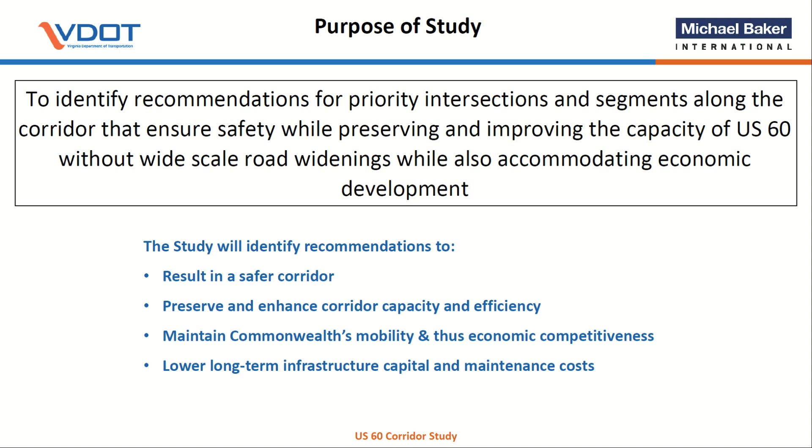The purpose of the study is to identify recommendations for priority intersections and segments along the corridor that ensure safety while preserving and improving the capacity of US 60 without wide-scale road widenings, while also accommodating economic development. The study will identify recommendations to improve safety, preserve the capacity and efficiency, maintain the Commonwealth's mobility and thus economic competitiveness, and lower long-term infrastructure capital and maintenance costs.

The scope of work for this study was to analyze intersections and 14 miles of segments along the corridor for development of detailed recommendations. These locations were determined by historic traffic volumes, potential for safety improvement as defined by VDOT, the crash history, and stakeholder input. The study assumed a 2040 horizon year. This horizon year represents the last year of projection period for need determinations.

We reviewed the future conditions to include additional traffic from other areas, for example, the proposed landfill and anticipated residential growth in Powhatan and expected growth as projected by the state and other planning bodies. We also reviewed if the current roadway and the future roadway with proposed improvements would be able to support this demand. Arterial preservation techniques were applied as feasible with VDOT's Arterial Preservation Program.

The study will identify opportunities to improve roadway geometrics and access management. It will also determine the existing and future capacity of US 60. And then finally, in response to citizen feedback, VDOT requested the completion of a roadway safety audit for the two-lane segment of US 60 between US 522 and State Route 601. This included site visits, a review of volumes, crash history, operations, road conditions, and geometric features.

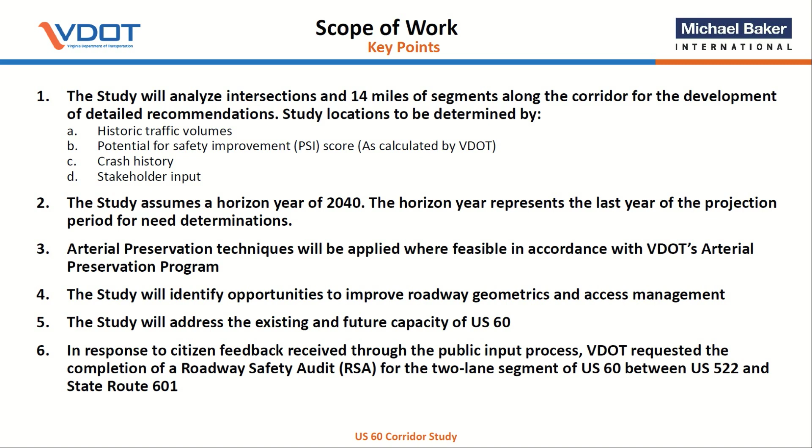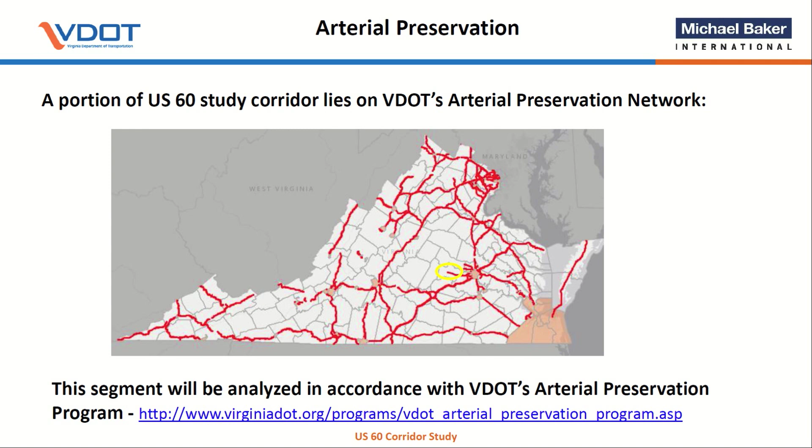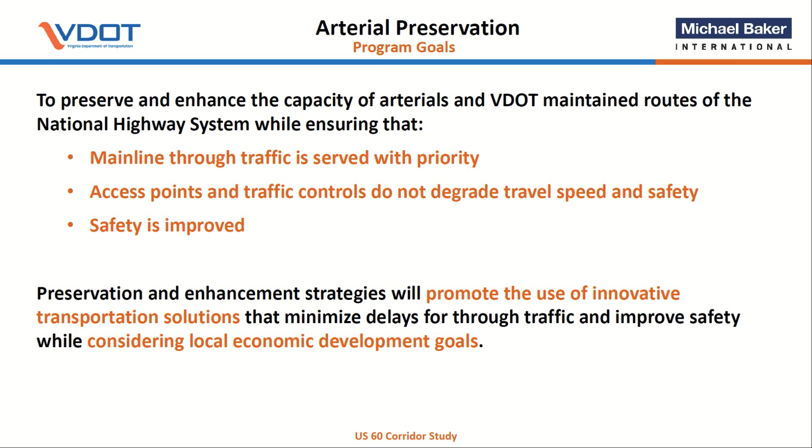The goal of the Arterial Preservation Program is to preserve and enhance the capacity of arterials and VDOT maintained routes of the national highway system while ensuring that the mainline through traffic is served with priority, access points and traffic controls do not degrade travel speed and safety, and that safety is improved. Preservation and enhancement strategies along the Arterial Preservation Network will promote the use of innovative transportation solutions that minimize delays for through traffic and improve safety while considering local economic development goals.

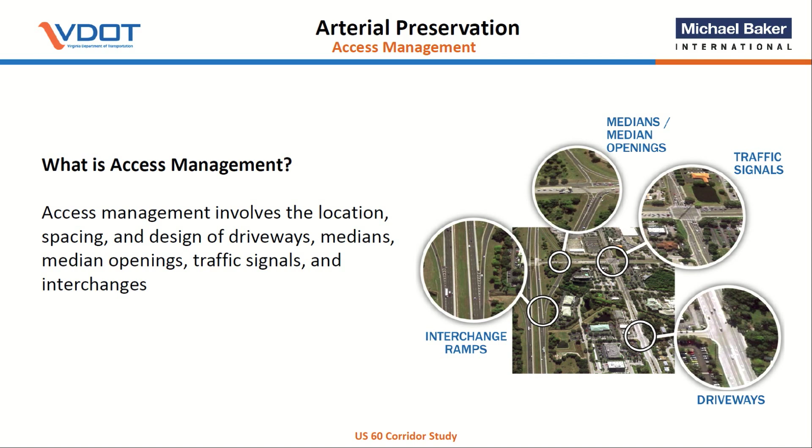One of the main tools of arterial preservation is access management. Access management involves location spacing of intersections, design of driveways, median openings, location of traffic signals, and location of interchanges. The guiding principles of access management include limiting the number of conflict points, separating the conflict points, and looking at conflict points from a network perspective.

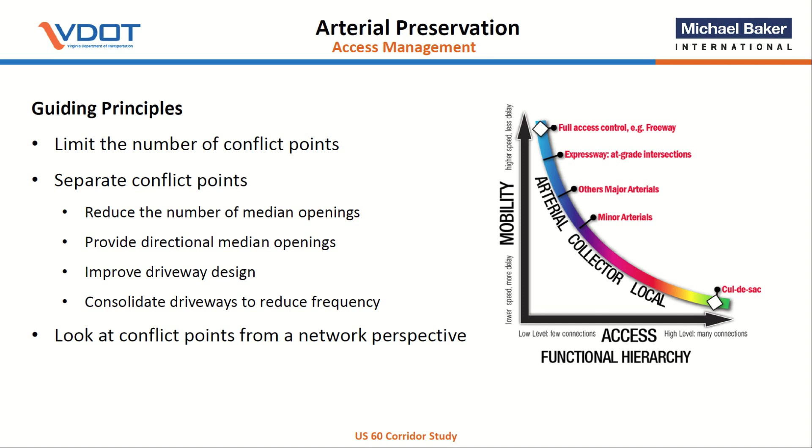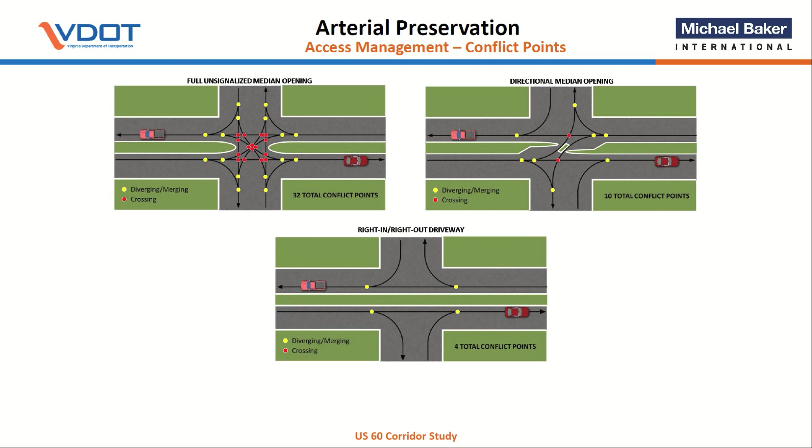In an ideal scenario, our arterial highways will provide a high level of mobility while our local roads provide a high level of access. In this example, we can see how simple access management techniques are effective in reducing conflict points. Conflict points are places where the likelihood of a crash occurring is greater. A full movement intersection contains 32 conflict points. That's in the top left box. By adding a directional median, that number can be reduced to 10 conflict points. That is in the top right box. If the median is closed, the conflict points are further reduced to 4. That is in the bottom box.

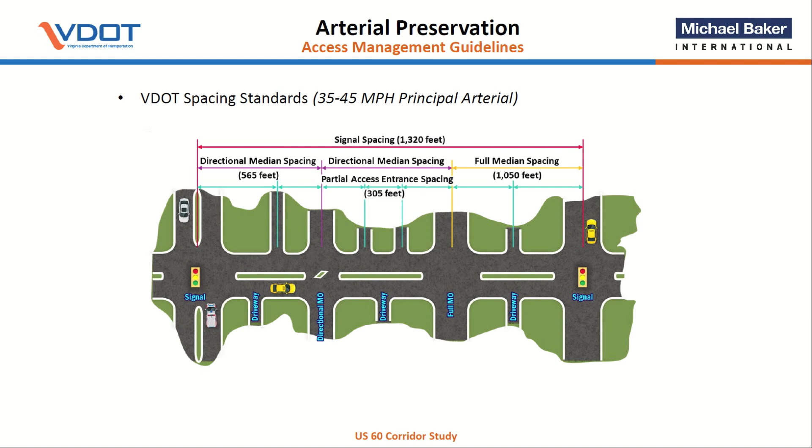VDOT maintains access spacing standards that take into account speed limit, functional classification of the roadway, and the number of conflict points at the intersection. Recommendations in the US 60 corridor study comply with these standards. It should also be noted that Powhatan County also has their own access management guidelines that were also applied for this study.

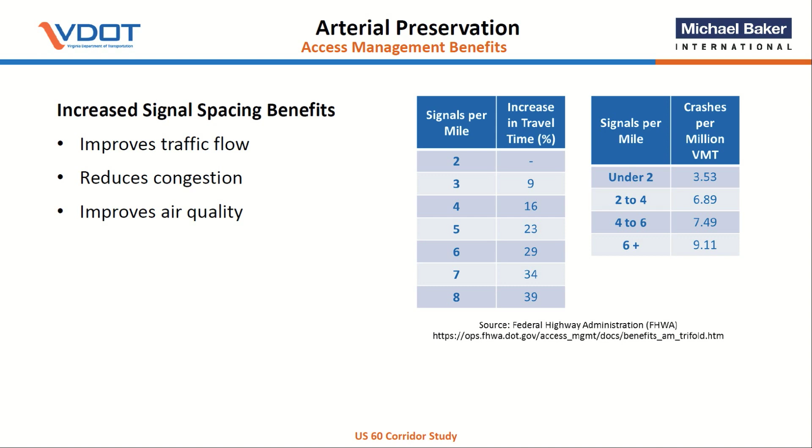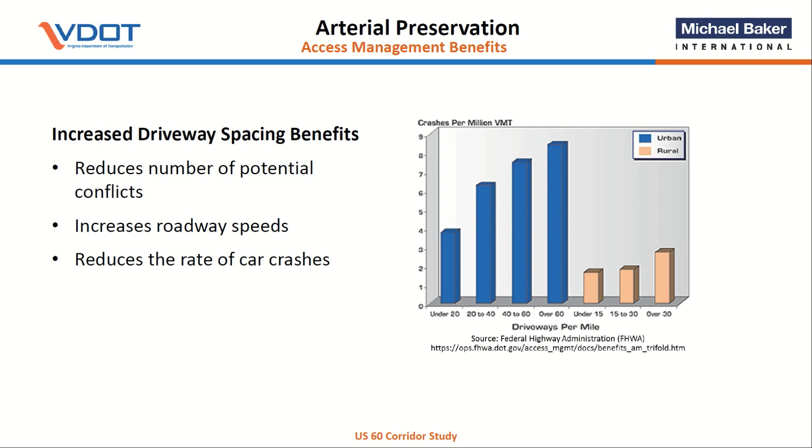As an access management strategy, increased signal spacing benefits include improved traffic flow, reduced congestion, and improved air quality. Another effective access management strategy is increasing driveway spacing. That reduces the number of potential conflict points, it maintains the speed of the roadway, and it reduces the rate of car crashes.

The other major tool for arterial preservation is the use of innovative intersections. These are designs where traffic movements are modified to improve safety, reduce delay, and increase efficiency. They have been proven to reduce delays and crashes by as much as 50%.

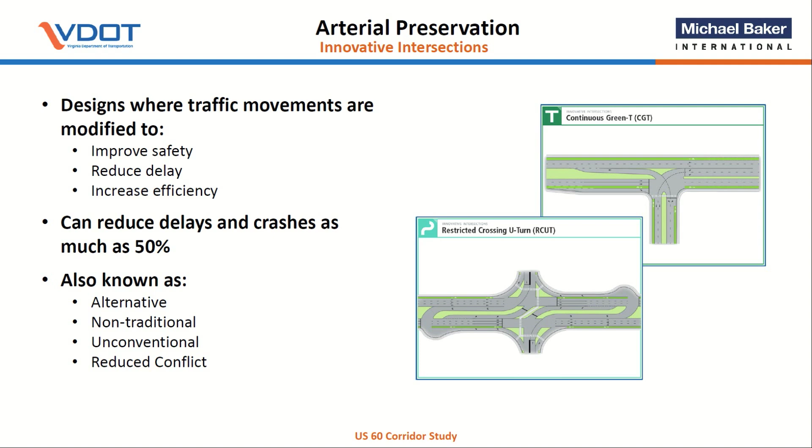Innovative intersections seek to reroute left turn movements. Since all traffic has to stop to permit a left turn, this helps to more efficiently serve the through traffic. They seek to reduce signal phases and reduce delay by allowing for longer green time on the through movement. They also improve safety by removing and separating conflicts.

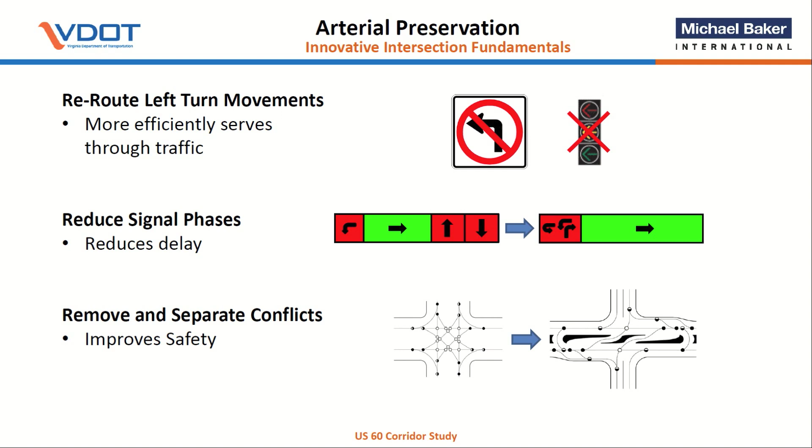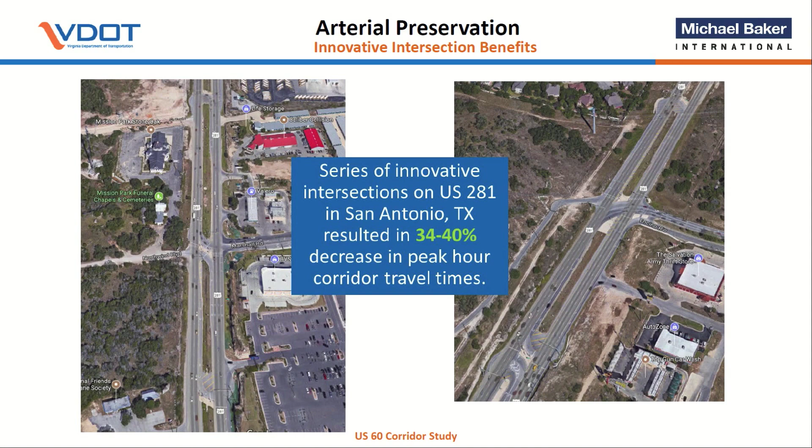The following two slides show examples of innovative intersections within the United States and their benefits. A series of innovative intersections on US 281 in San Antonio, Texas resulted in a 34 to 40% decrease in peak hour corridor travel times. A safety analysis of restricted crossing U-turns, or RCUT, intersections in North Carolina found that fatal and injury, angle, and left turn crashes decreased by more than half following the RCUT installation.

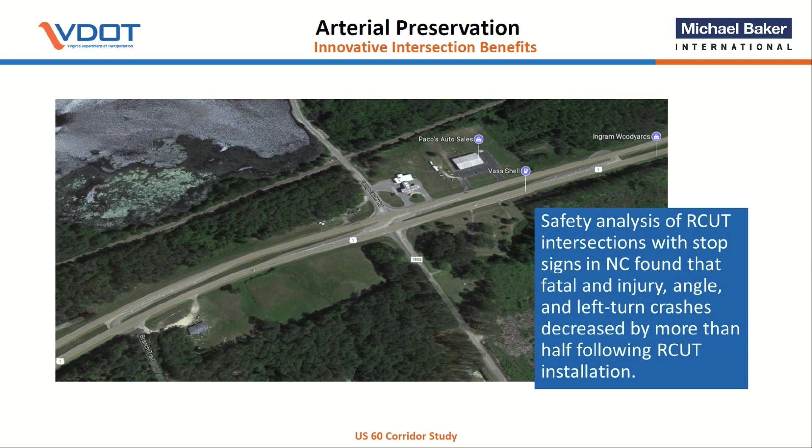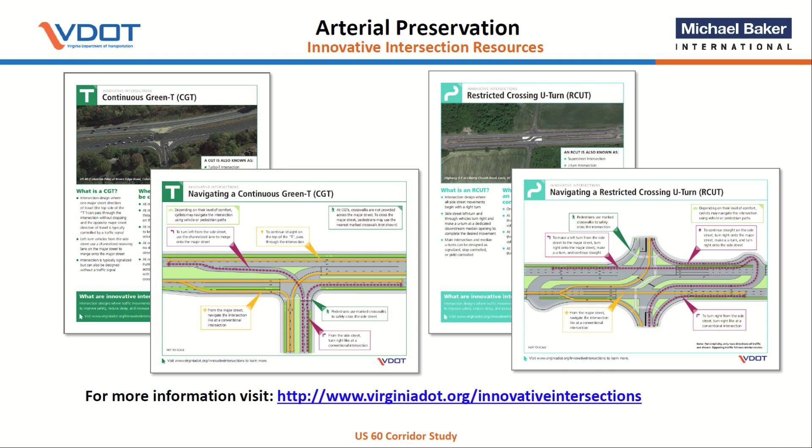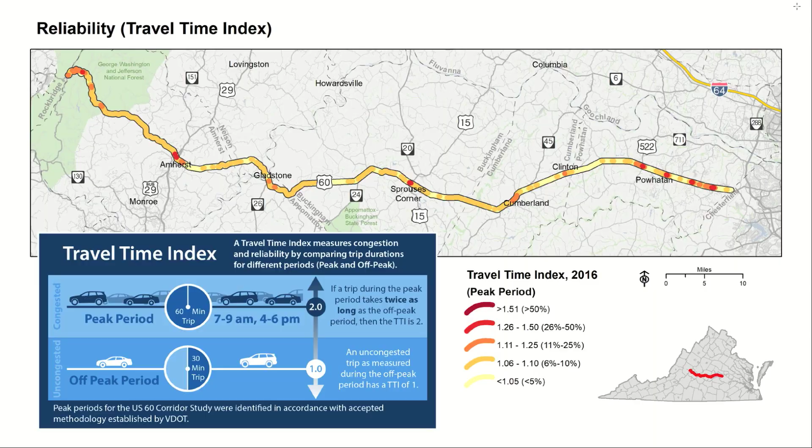We have provided a booklet on the VDOT project page that illustrates travel times and expected level of service of corridor segments between the Powhatan-Chesterfield County line and the town of Amherst's eastern limit. These pages will let you know expected travel times and level of service during a peak period, AM and PM, and during what condition. Existing is the type of conditions you would expect today.

No build scenario is the expected traffic that you would expect in 2040 with no new roadway improvements. The build scenario is the expected traffic you would expect in 2040 that reflects the mitigation impacts of the study recommendations. Most segments will not have a build scenario, as congestion was not a driving factor along those segments.

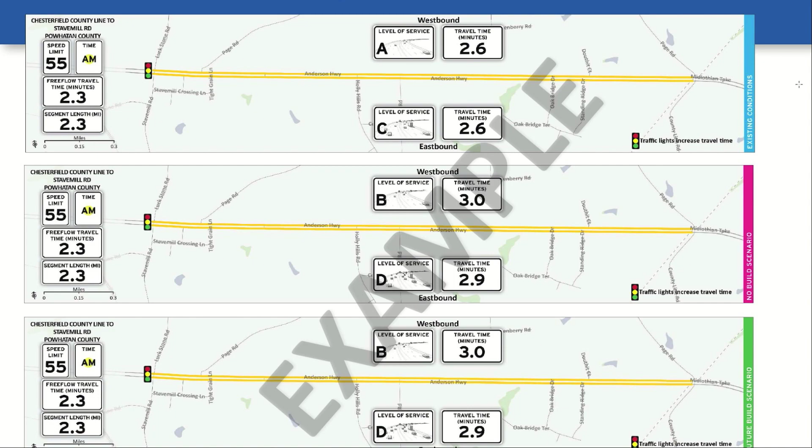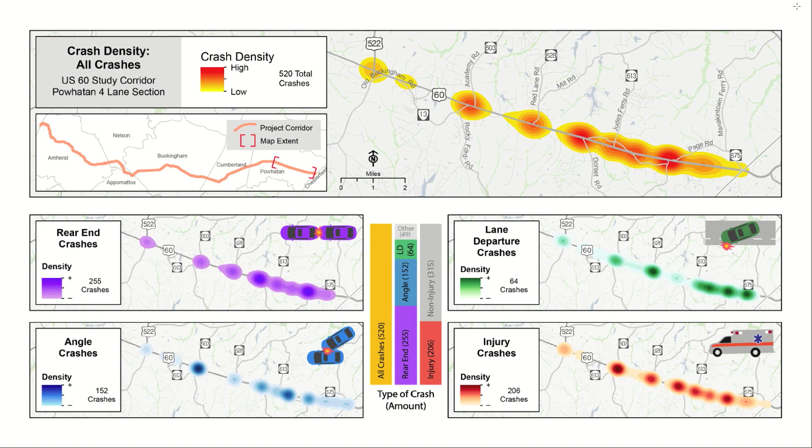The next series of slides are going to be crash density maps that contain data from the VDOT crash database for the years between 2013 and 2018. This section right here is in Powhatan County, the 4-lane section between 522 and the Chesterfield County line. Most of the crashes are at conventional signalized intersections. This segment also has the highest density and most crashes along the whole US 60 corridor that was studied.

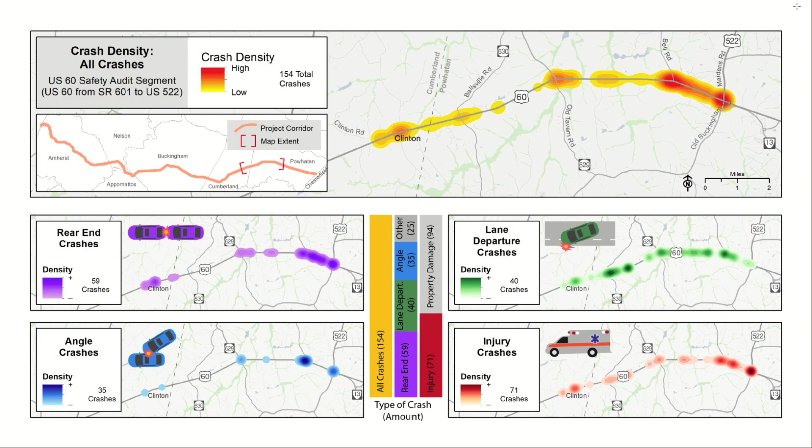This is a crash density map of the roadway safety audit segment between US 522 and State Route 601. We have included a video from our roadway safety review on the VDOT project page and have concluded that the majority of crash types are intersection related. Most of these intersection related crashes are a result of the Maidens Road US 522 and US 60 intersection. However, the remaining crashes can be attributed to driveways and other intersections. Those areas of concern were a residential segment near Bell Road and the Bell Road segment itself, and the Old Tavern Road intersection. Additionally, there were some roadway departures on the western portion of the segment.

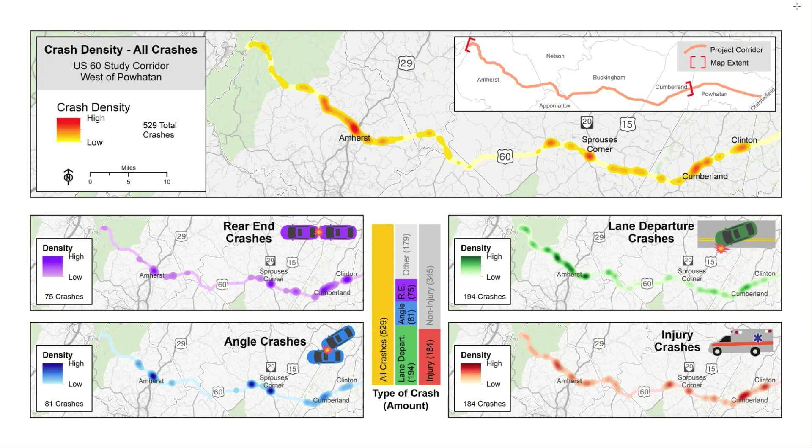This is the crash density map for the remainder of the corridor. Hotspots along the segment are focused in Cumberland Courthouse area, Sprouse's Corner, the segment between Route 56 and Highway 45, the segment between Route 29 and Main Street in the town of Amherst, and a section just west of the town of Amherst. This section west of the town of Amherst is between East Monitor Road and West Monitor Road. That section is identified as a potential safety improvement segment by VDOT. It should also be noted that the town of Amherst crash data reflects crashes that occurred prior to the recent roadway improvement that occurred within the town of Amherst.

For this study, 2 public meetings were conducted in July of 2019. 116 participants attended the 2 meetings. 57 comments in total were received regarding the study.

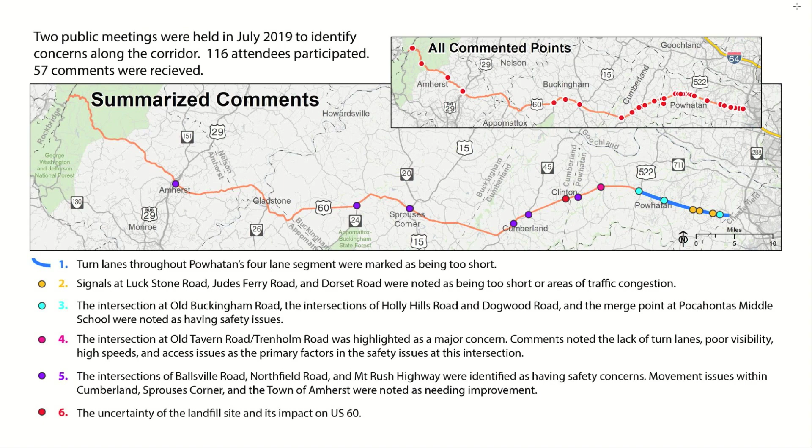General comments included concerns with additional truck traffic anticipated from the Green Ridge landfill, safety concerns along the 2-lane portion of US 60 between US 522 and the Cumberland County line, and concerns regarding increased traffic in eastern Powhatan.

For the next portion of this presentation, we will review the recommendation process and our proposed recommendations. All the recommendations being presented today are preliminary concepts. They have not been approved in a resolution by locality, and they are not funded. It is important to note that no recommendation will move forward without local government support.

Concepts shown have been vetted by stakeholders and engineers, but do not represent the final design. Based on feedback from this presentation, recommendations will be updated accordingly and reviewed by local officials and governments. The speed at which this occurs is entirely up to the respective locality.

Should a locality decide to advance a recommendation for construction, they will first need to submit for funding, which typically occurs through a process called SmartScale. If you are interested in learning more about this process, we encourage you to visit the VDOT SmartScale website at vasmartscale.org. The SmartScale application window opens once every 2 years. During the application period, localities submit projects that are then scored based on their merits.

Should projects get selected, they will need to go through right-of-way acquisition, if applicable, design, and permitting. This typically takes 6 years, but can vary based on the complexity of the project. Depending on the project scale, construction of the proposed concepts may take up to 2 years to complete. In summary, advancing a recommendation to a completed project will take a minimum of 10 years to completion.

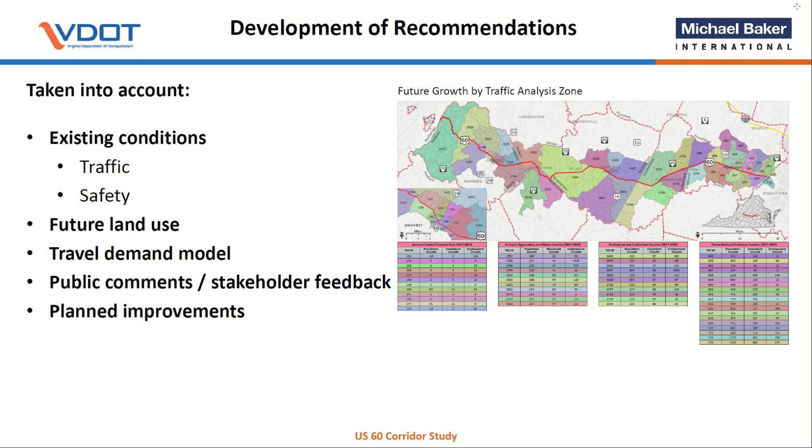The next few slides are going to cover recently completed, previously planned, and approved recommendations, recommendations within Powhatan County, Cumberland County, Buckingham County, and Amherst County. The previously planned and approved recommendations that have occurred along US 60 have occurred in Powhatan County, Buckingham County, and the town of Amherst. The town of Amherst project listed below is a recently completed project.

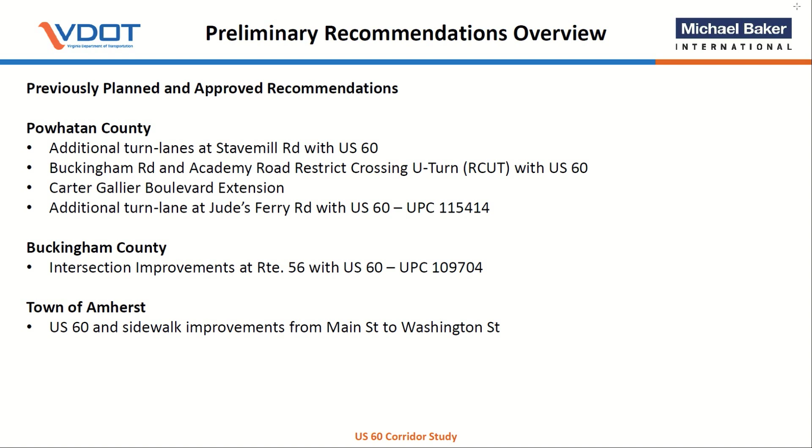The other projects that you see on this list that have a UPC means that they are funded projects. The remaining projects on this list in Powhatan County are not funded but are planned by VDOT and Powhatan County.

We highly encourage you to visit the VDOT Innovative Intersection website prior to viewing this section to help understand the concepts presented. This next section will go over Powhatan County preliminary recommendations. All of these recommendations in Powhatan County have undergone a review by Emergency Medical Services and School Transportation. Both of those services have concurred with these recommendations.

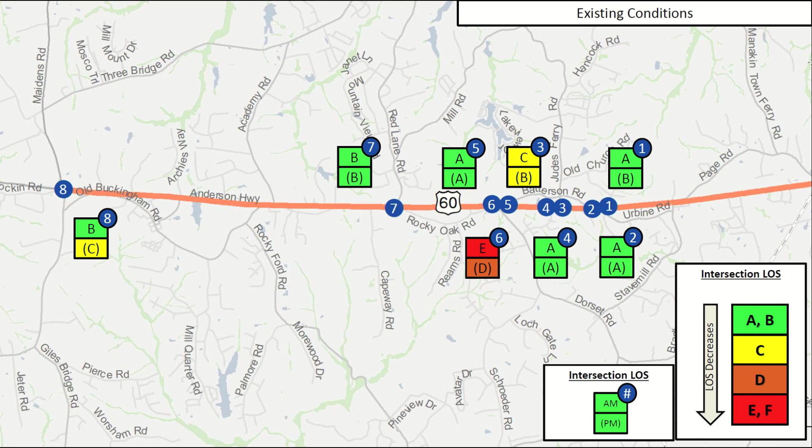However, Jude's Ferry does have a significant amount of congestion, especially in the westbound direction. Dorset Road has a lot of congestion in both directions. And then at Maidens, most of the congestion is heading eastbound, although there's definitely some noticeable backup on all approaches.

In the future, it's going to get worse. This accounts for all the growth that can be expected in Powhatan County. This is all the growth that's anticipated from everywhere along the corridor. So it can be from Chesterfield County, it can be from Goochland, it can be from the west part of 60. Just any development that is going to occur has been taken into account. And this is what you would expect to see if nothing is improved. We just maintain the status quo.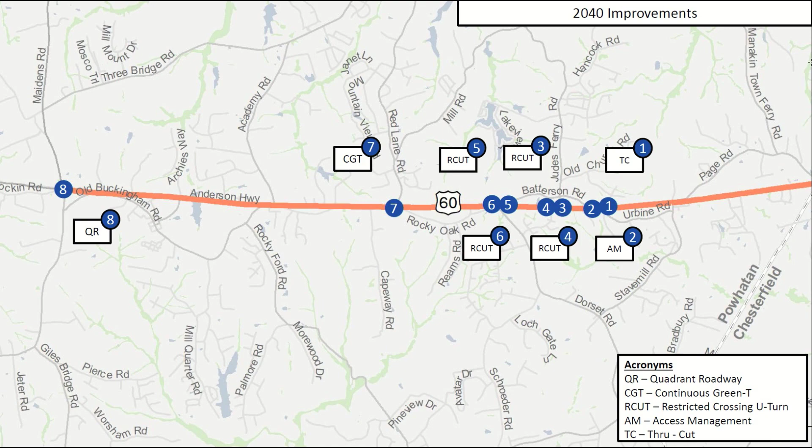This slide is an overview of the recommendations that we're proposing on US 60 for all these intersections. The bottom right corner has those acronyms. So if you're going on the Innovative Intersection website, you can just reference this slide and then see which videos to look up to help guide you through this process.

The proposed improvement you see is a restricted crossing U-turn in the New Dorset Road and Jude's Ferry Road area. This improvement will improve operations and safety. The biggest operational issue is at Jude's Ferry, where the westbound and eastbound directions experience a significant amount of backup. The westbound direction in the PM experiences a lot of backup.

With this proposed improvement, the eastbound direction at Jude's Ferry Road does not have a signal anymore because there's no conflicting movement. So that just keeps on moving. The westbound direction now has more green time so that it can move through the intersection faster. And then both the left turn movement and the movements coming off of Jude's Ferry will also experience a quicker movement.

Now, the pink arrows show the movements that you can typically make at intersections. So if you were able to make that before, you can still make that in this configuration. The blue areas show how to reroute through the intersection. So at Jude's Ferry, you can't make a left off of Jude's Ferry anymore and go eastbound. You have to make a right and then make a U-turn at New Dorset Road where that blue arrow is.

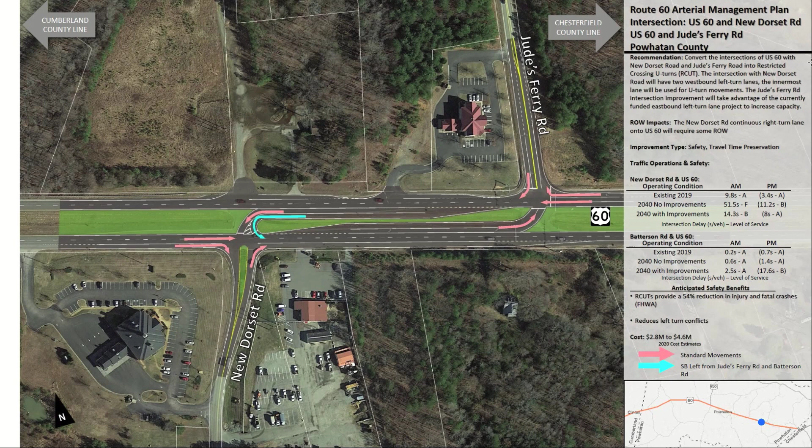The proposed recommendation at Dorset Road is to reconfigure the intersection into a restricted crossing U-turn. It also involves Batterson Road in this improvement. This is an operational improvement and a safety improvement. The operations today are very bad. It's going to get worse in the future as growth occurs. Our proposal will improve operations better than existing conditions, and that's with growth. Again, safety. Safety will be improved because now there are fewer conflict points at these intersections. As mentioned before, RCUTs can reduce injury and fatalities up to 54%.

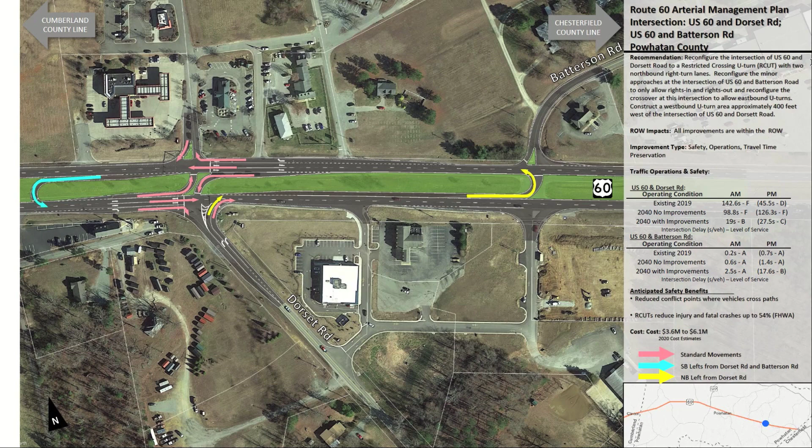The pink arrows are movements that you made before and should expect to make still in the future. The blue and yellow arrows are showing you how to get around the intersection for a movement that was relocated. So, for example, the northbound approach on Dorset Road, if you want to go west on 60, you would make a right where that yellow arrow is, go into the turn lane where that yellow U-turn arrow is, make a U-turn at that intersection, and go right on through.

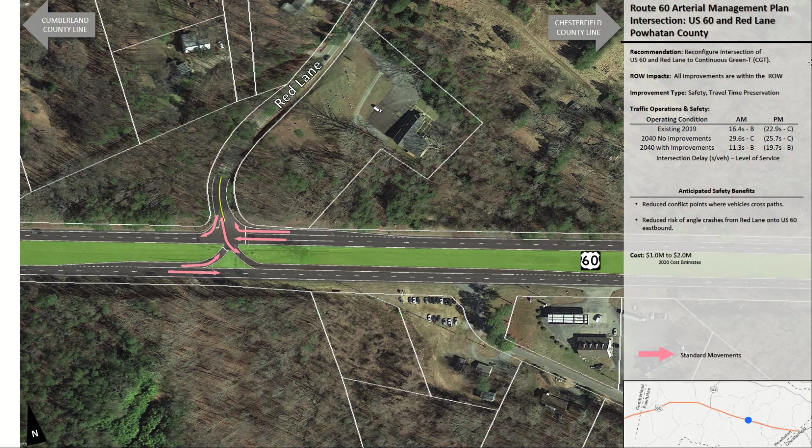The proposed improvement at US 60 and Red Lane is a continuous green T. This is to improve operations that are happening at this intersection. There were some crashes, mainly angle crashes, with the left turn coming off of Red Lane and 60 eastbound. So a continuous green T, like mentioned before, improves operations, and that's because the eastbound 60 movement doesn't stop. It's always green, and that can be accomplished because the left turn movement off of Red Lane goes into an acceleration lane that merges with US 60 eastbound. That also essentially reduces the risk of an angle crash because now you're merging instead of going directly in front of the vehicle.

The proposed improvement for US 60 and Maidens Road, US 522, is a quadrant roadway. Quadrant roadways redirect left turns through a quadrant roadway that you see in the northeast corner. The main intersection still exists, although all you can do at that intersection would be to make through movements and right turns. The colored arrows show you how to make a left turn or to reach your final destination through the quadrant roadway. This improvement also includes a roundabout and a continuous green T, which also have their own operational and safety benefits. Overall, this is going to improve operations.

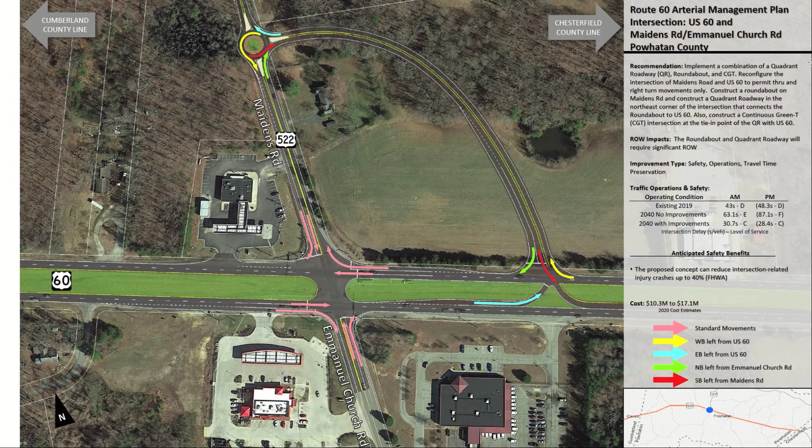Under the operating conditions, you can see that in the future, it's going to get worse. Upwards of 60 seconds or more of delay experienced per vehicle. With this improvement, vehicles can expect to experience delays up to 30 seconds, so about half of that. From a safety perspective, the proposed concept can reduce intersection related injury crashes up to 40%.

So, just to remind, this is the future conditions without any improvements, the status quo. We don't change anything. With the proposed improvements, we're going to have a lot better throughput, a lot better delay, a lot better operations, a lot better safety along the US 60 segment in Powhatan County.

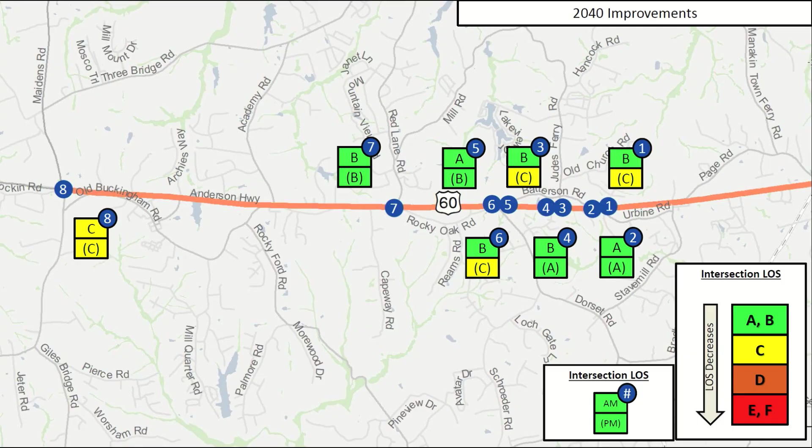This slide is just a summary of the proposed improvements along the roadway safety audit segment. Again, this was conducted in response to citizen comments received through the public input process. There was a very intensive field investigation, but also review of the crash history and traffic volumes along the segment. Specific locations that we provide recommendations for, but really identified had the problem there.

The first one, the biggest one, was Maidens Road and US 522. So that intersection, although the intersection itself had a lot of angle crashes and rear ends in the immediate area, reviewing the crash history, that crash history is just a string of rear ends and roadway departures, essentially heading west, going into the Maidens Road 522 intersection. So that improvement of the quadrant roadway will do a significant benefit to the segment. The next area was Bell Road and US 60, and just the area around it where those residences exist.

There's all those driveways. There's a lot of angle crashes, roadway departures, and rear ends, and that's just a result of not just the Bell Road intersection and having a hard time seeing that, but just folks going in and out of their residences and not really an area to escape to.

So what we're providing is a two-way turn lane with shoulder rumble strips and a safety edge. A safety edge is just a beveled shoulder that helps you recover. So if someone were to run off the road, a safety edge is just a reactive measure so that it's easier for you to recover and go back into the travel lanes.

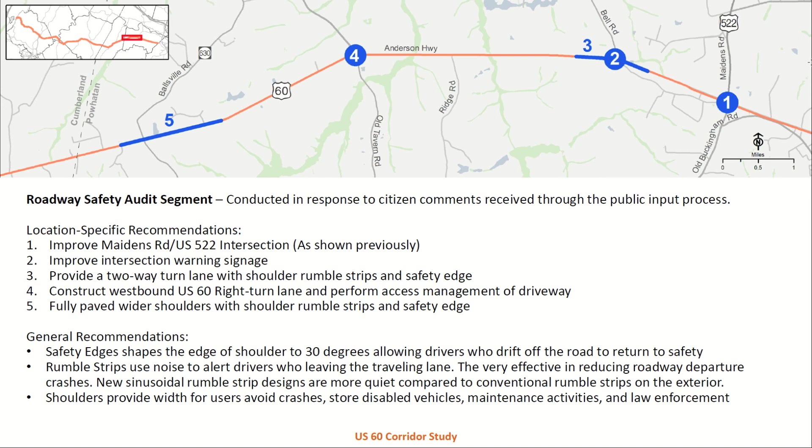And then shoulders, wider shoulders, overall will help avoid crashes. It does store disabled vehicles and allows maintenance activities and law enforcement. So there's a lot less risk of an incident with those vehicles with wider shoulders. That concludes our Powhatan County recommendations.

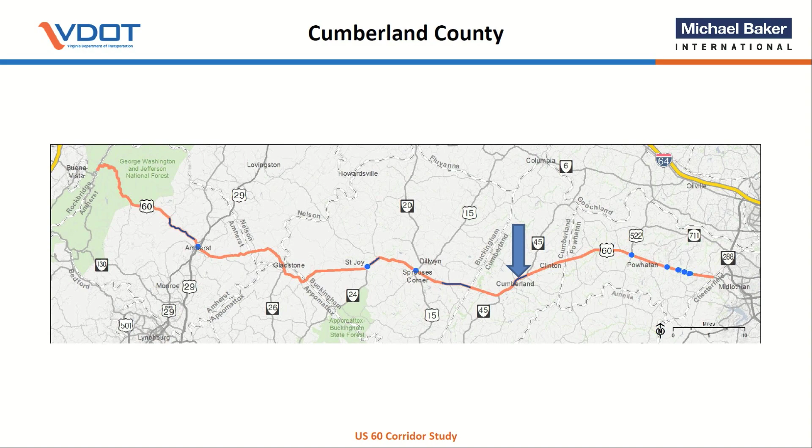The next area we're going to go into is Cumberland County, and we did review a segment within Cumberland County. It goes from 45 Cartersville Road all the way into the town. And this was an area with a lot of crashes along the segment. The first area that popped up in our review of the crash history and just our field review was at Cartersville 45 and US 60.

Our proposal is just a realignment of that intersection, just going out there. A lot of folks just kind of use each and every leg of that intersection. We want to straighten it up and make it more understandable, especially since there's a lot of recreational drivers that come out here. So again, this realigns the roadway.

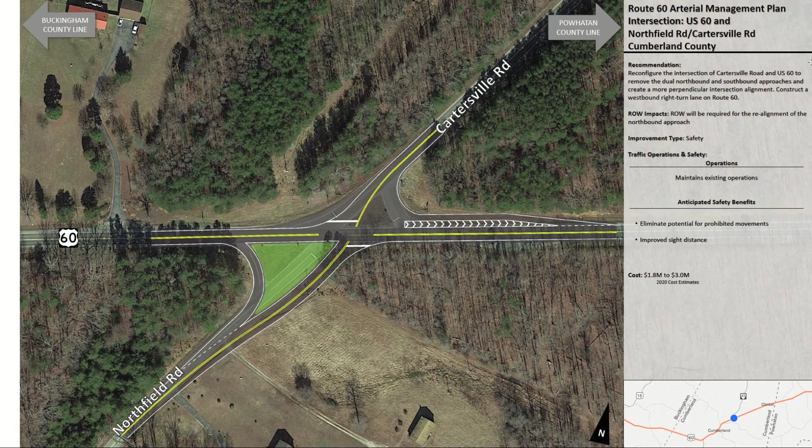It does also include an offset right turn lane, and what an offset right turn lane does is it's offset to the side so that when folks on Cartersville Road need to make a left or right, their view is not hindered by vehicles making a right onto Cartersville Road.

The rest of the segment is mainly just signage and pavement markings. This area in between Old Buckingham Road and Poorhouse Road, there's a lot of sign congestion there, so we want to consolidate those signs and renew the sign markings and also provide some advance warning for those offset intersections.

Over at Trents Mill Road, there was a lot of overrun crashes in that immediate vicinity. The crash history, but also the field visit showed a lot of fading grass off the shoulder. So we're recommending increasing that pavement area so we can reduce the risk of overruns from turning vehicles.

Finally, as you approach into the actual proper area of Cumberland, there's a speed reduction. So we want to make sure people are aware of that speed reduction more so with the addition of lane reduction markings or lane rumble strips as you approach the 35-mile-per-hour speed limit. That concludes our Cumberland County review of recommendations.

The next area we're going to go over is Buckingham County, and the first segment is going to be the Cumberland County line to Rosny Road. This area was more lined with off-road crashes, so we want to find ways to help reduce that. And rumble strips are very effective.

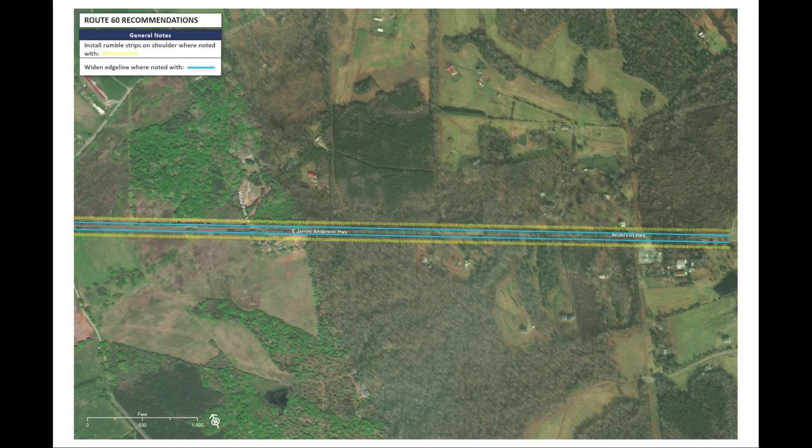They can reduce off-road crashes up to 40%, and also edgeline markings just to brighten those up. It gives the driver more attention to where the road is in terms of the shoulder. So our recommendation is going to be shoulder rumble strips and lane markings.

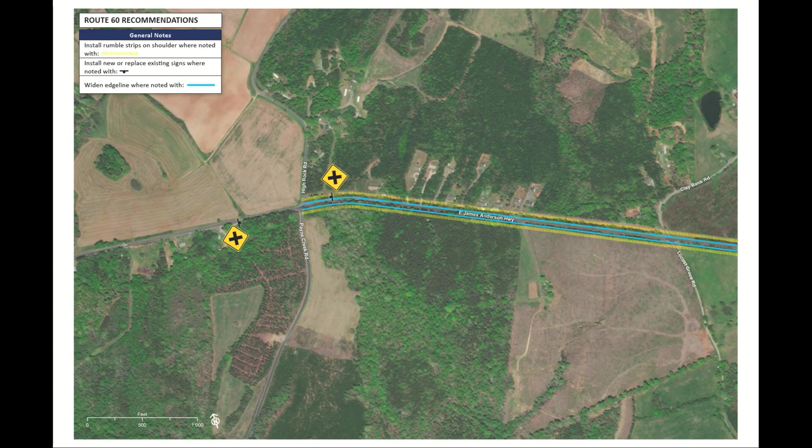There's also an intersection that had a lot of crashes. We want to provide more advance warning signage that is not there today. Again, more markings to identify the roadway. There's also some guardrail out there today that should be upgraded with better end treatment, but also delineation can help identify those markings at night.

The next area is Sprouse's Corner. This intersection has a lot of angle crashes. It is currently a traffic signal. It's not operationally bad, but it definitely can get a little bit worse in the future. But our proposal is to use a single lane roundabout.

Single lane roundabouts are very effective in essentially eliminating angle crashes, which is the issue at Sprouse's Corner, but it's also very good at maintaining traffic flow. And you can see that not just from a safety perspective, that we can essentially eliminate angle crashes and reduce injuries and fatalities, but we can also help improve the operations of this intersection.

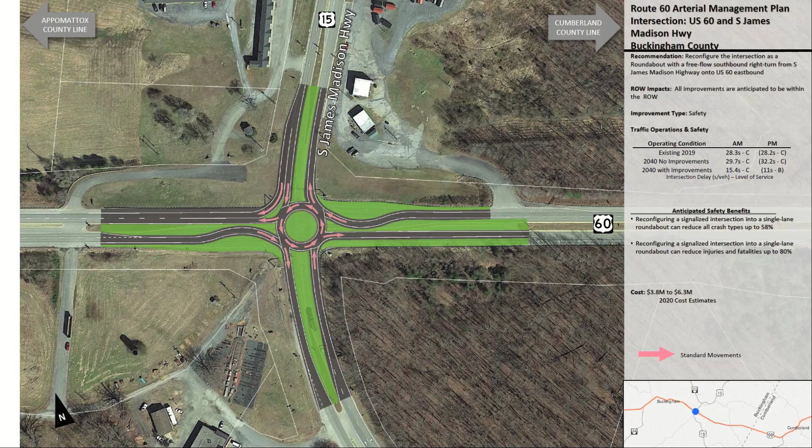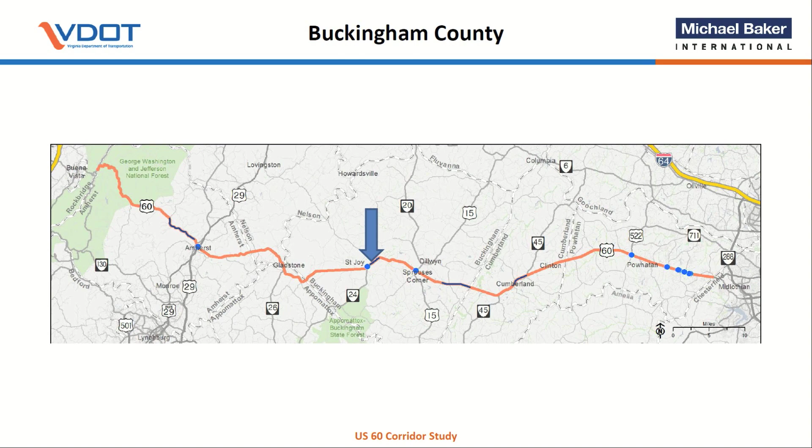The next area in Buckingham County was from James River Highway to Mount Rush Highway, 24. And this area did receive a lot of public input. Based on our field review, it's a fairly narrow segment and somewhat uncomfortable driving through it. It's important to note that there's already a turn lane improvement at James River Highway. That is a funded VDOT project to add in turn lanes there, but we also are proposing some other type of delineation along this US 60 segment, to give more advanced warning of some of these other intersections.

And how that works is the flashing lights are on the main road and they're not flashing all the time. They're only flashing when a car approaches that stop sign on US 60. So that way, folks on Mount Rush and US 60 westbound are aware a vehicle is approaching that stop sign. So the driver has time to react and know that someone is coming up.

The last area of recommendations is in Amherst County, and the first part is at Route 29 and Route 60. There were a lot of comments on the section of the US 60-29 interchange on US 60. For folks who are not familiar, the section west of Route 29 on US 60 used to be a 4-lane section. Now it is a 2-lane section. Our proposal is just to continue that 2-lane section through on US 60. So through the interchange, keep going east. This makes it more cohesive, more understandable.

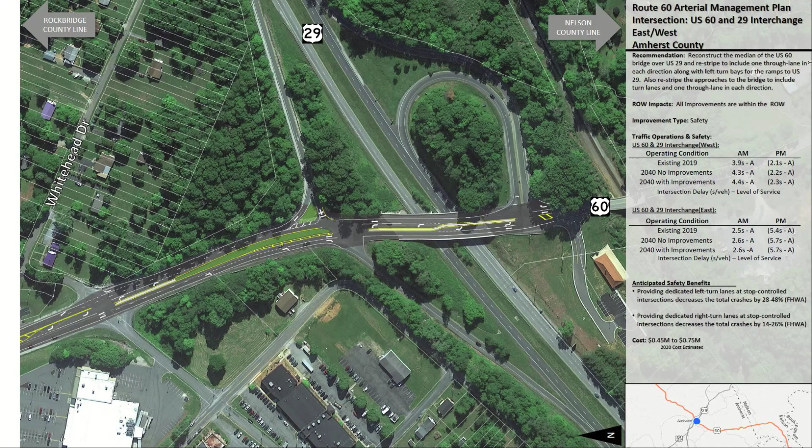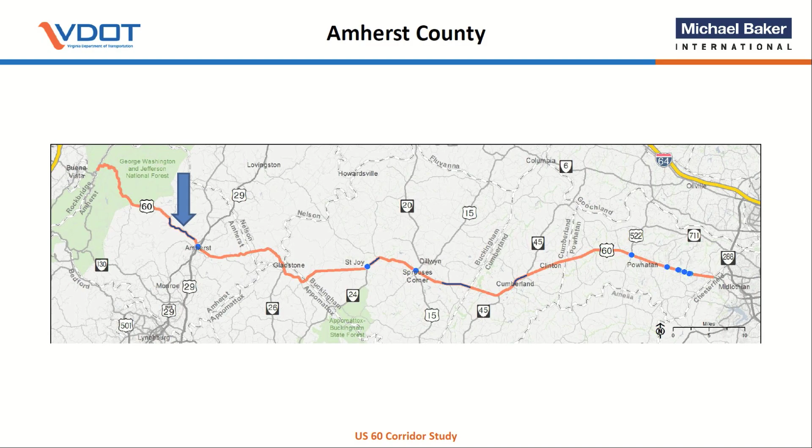The last recommendation area is Monitor Road, so East Monitor Road to West Monitor Road on US 60. This is a potential safety improvement. It's identified by VDOT, so it has a lot of crashes along this whole segment. Most of these crashes are off-road. Some are sideswipe, but they're sideswipe with the opposite direction or sideswipe coming off into a turn.

So again, shoulder rumble strips are very effective in reducing off-road crashes. So are safety edges where they can be installed. And we just identified areas of high risk of off-road departures. The blue dots are just delineation of existing guardrail because that can help at night. So you can kind of guide the curve. You can determine what that curve is going into it at night.

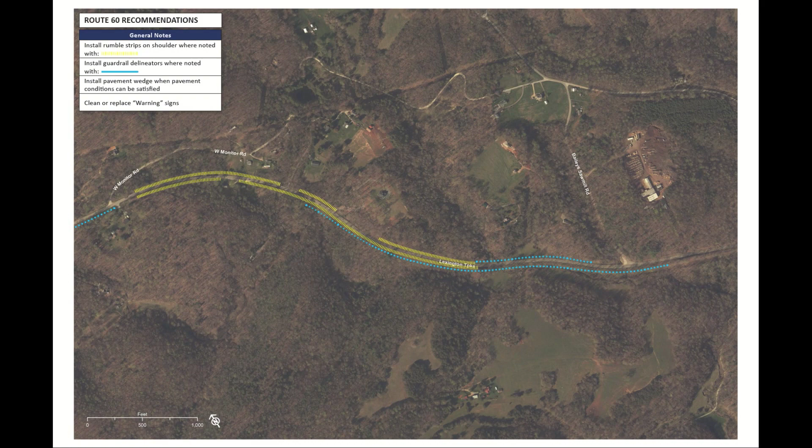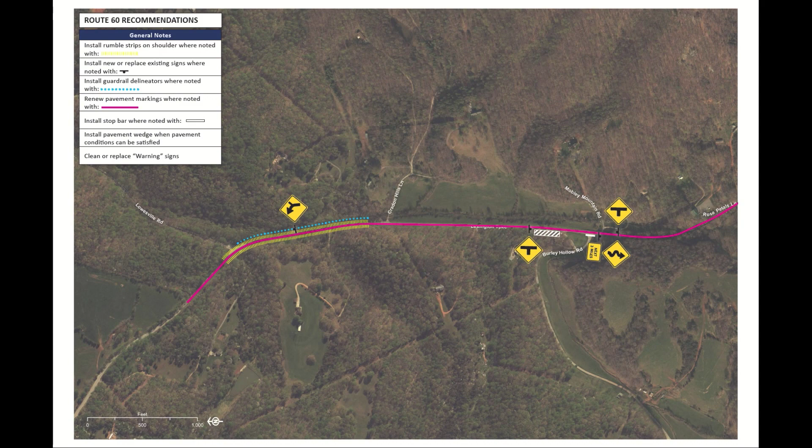This pink line is just an area where we identified there were older pavement markings that should be updated. And then just more signage to help identify areas as you're approaching. That concludes the preliminary recommendations.

VDOT would like to hear from you regarding any comments you may have on the US 60 corridor study recommendations. The public comment period is open from March 26, 2020 to April 11, 2020. Additional US 60 corridor study materials are available on both the Lynchburg District Project website and the Richmond District Project website. Please provide comments by April 11th to Daryl Johnson, the VDOT Project Manager.

Comments can be provided by mail at 1401 East Broad Street, Richmond, Virginia 23219, or by phone at 804-371-8868 or 800-367-7623 or TDD/TTY 711, or by email at daryl.johnson@vdot.virginia.gov. Please reference Route 60 corridor study in the subject line of any email correspondence.

This concludes our presentation. Thank you for your interest in the US 60 corridor study.